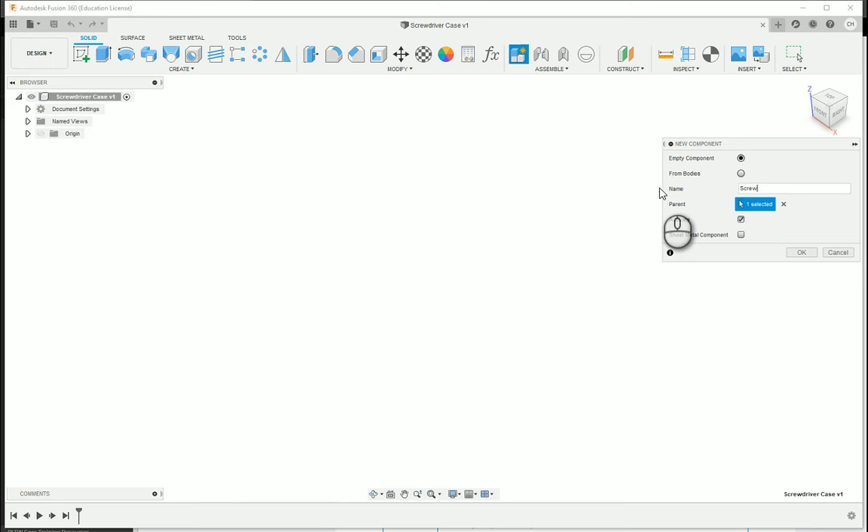Within activity 134 CAD modeling skills, I've already got a folder created. I'm going to call this the screwdriver case, and go ahead and hit save. Now, within the folder, in this new file, I'm going to create a new component, and call this the screwdriver base.

I'll say OK. So this is going to be active, and I'm going to say create new sketch, and choose the top plane here for our base to start off with. I'm going to create a polygon, a circumscribed polygon, and choose the origin as the center.

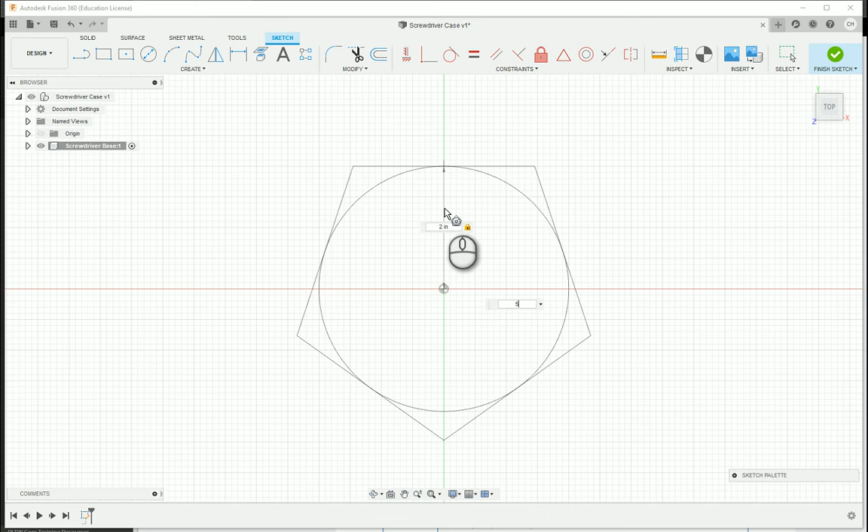I'm going to do 2 inches, and then set 5 sides, and hit enter. Now, just to help maintain it a little bit, I'm going to do a horizontal vertical constraint between this point and the origin, and that'll kind of lock it into place. At this point in the activity, I did 2 inches as an arbitrary number.

We're going to base some measurements off of that. This activity doesn't give us any measurements to work with, so we're just working as we go along. But what we're going to end up doing is say finish sketch.

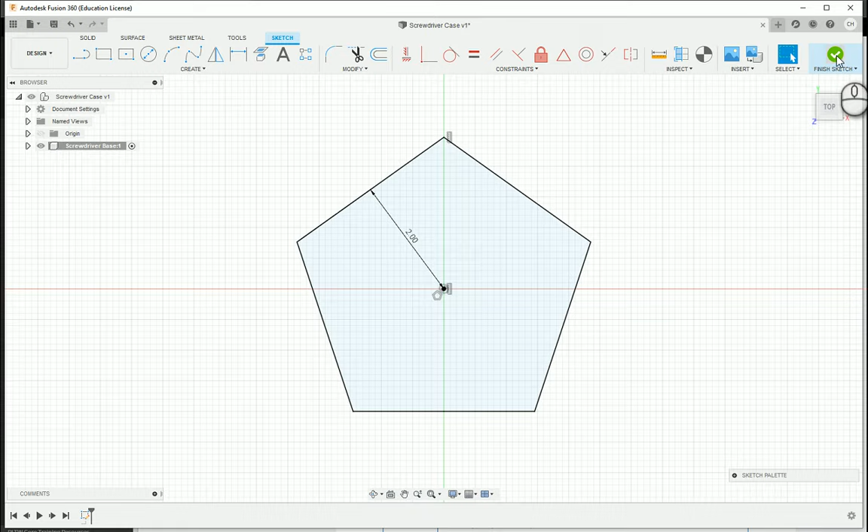I'm going to choose extrude, and we're going to approximate an extrusion distance. I'm going to pull this up just a little bit so we can see the effect. And here the taper angle, we're going to set to 45 degrees. Now, the 45 degrees is going to flare out.

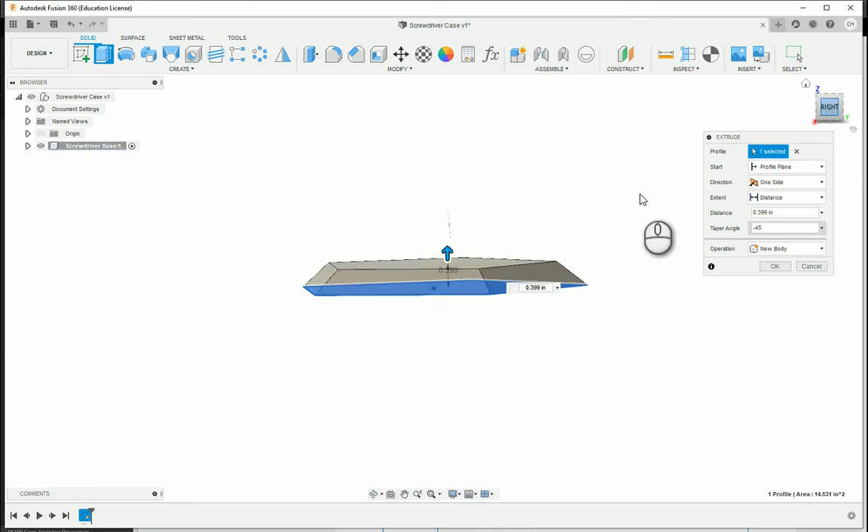What we want is for it to actually come inward, so kind of like this. Now the extrusion distance, again, we're approximating. Let me see what 0.25 looks like. That looks okay, you know, so I think we'll go ahead and run with it. Again, we're just using some approximations there.

Okay, so now for letter B, we're going to create another inward tapered extrusion from the top surface and bring it down toward the bottom. So it looks like we're going to make sure it flares inward towards the top of the part.

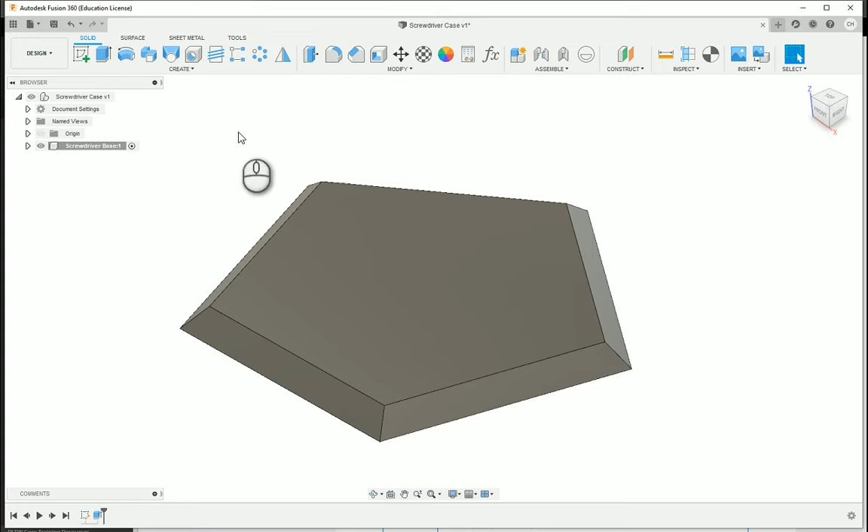So what I'm going to end up doing is create a new sketch. I'm going to choose the top plane, and use the project tool, and go ahead and click these outside lines—not the very outside lines, but the outside lines of the top face. You'll see they turn purple when you get those.

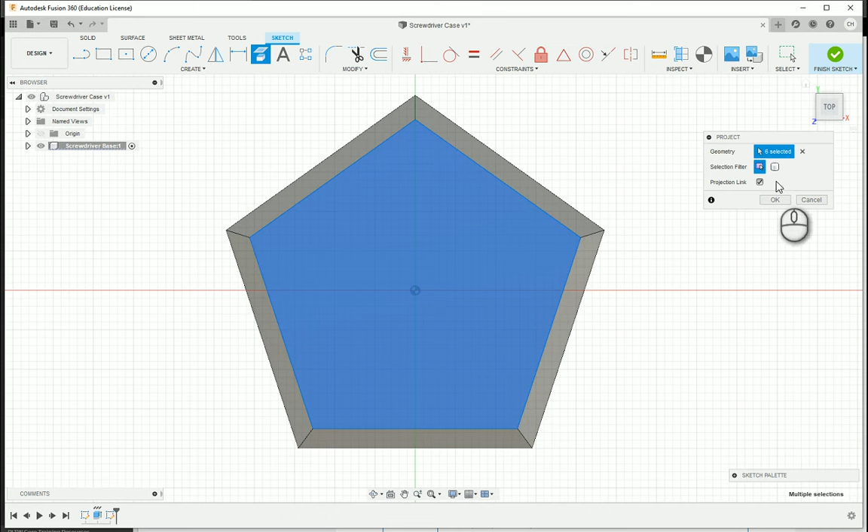And I'm going to say OK. Six are selected, but it should only be 5. I think I might have clicked something twice. But here, 5 sides, goes through. I'm going to go ahead and finish the sketch.

I'm going to extrude. This time I'm going to extrude up. Let's go through and do, based on the heights, 1.5. And we're going to do a taper angle again to the inside. They don't really give us an angle to work with, so I'm going to do 10.

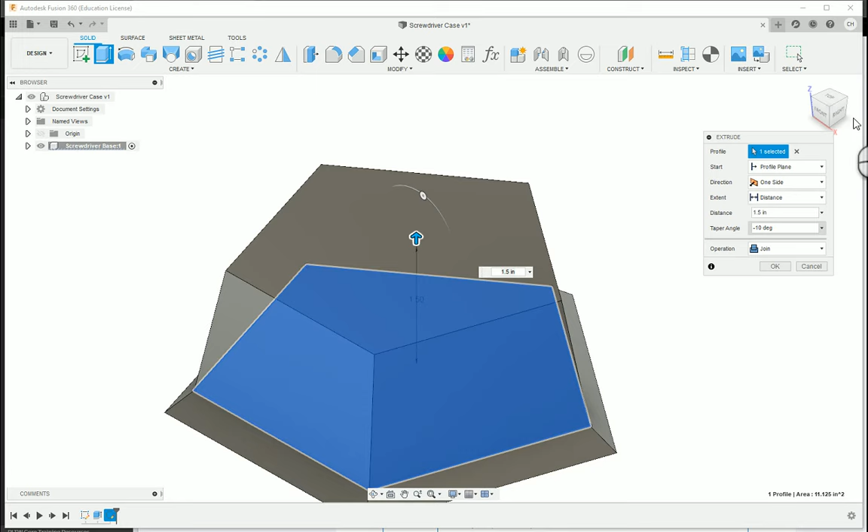Again, it kind of comes to the outside, so let's go to the inside. 10 may be, just from gauging here from the images, a little bit too much. Let's go with 5, negative 5. There we go, and I think that looks pretty good. So I'm going to go ahead and say OK.

So that's kind of how you can use taper angle on extrusion to make that happen. Okay, what we're going to do is create a loft between 2 shapes in order to create the kind of thing. This is number 17.

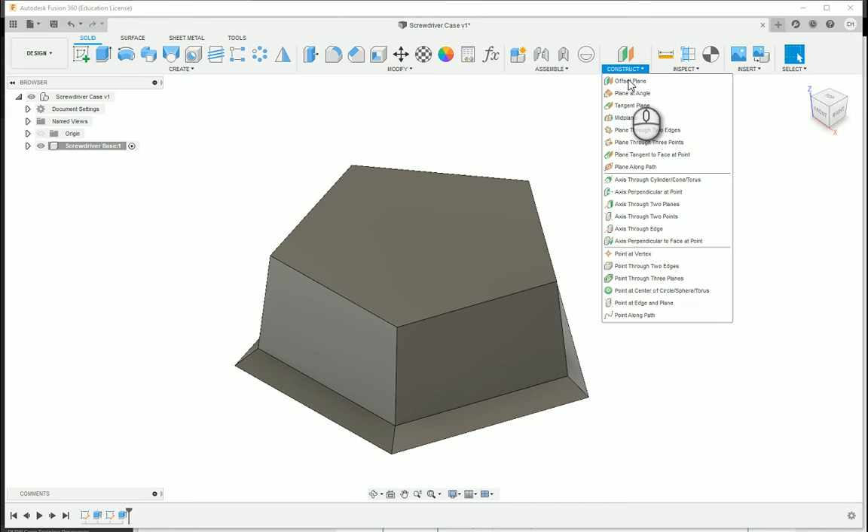We're going to construct a new plane that is offset from the top surface of the model. So this is going to be in the construct panel, and we're going to choose an offset plane. I'm going to choose the top of my base that I have set, and go ahead and set an offset plane.

From the side here, again, they're not giving us any measurements, so let's do 0.5. So 0.5 looks to be pretty good. And what I'm going to do is say OK.

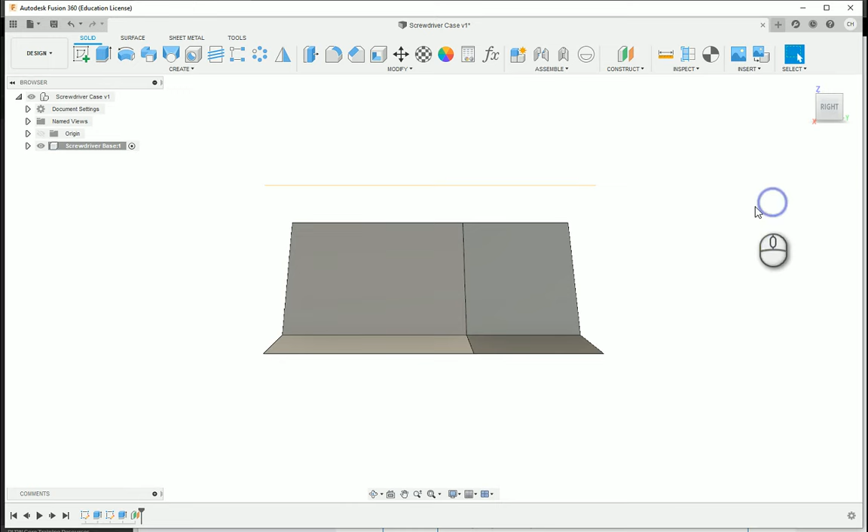And then I'm going to go ahead and create a new sketch on the plane that I just created. And what I'm going to end up doing is project the outside edges, very much like what I did before with the taper.

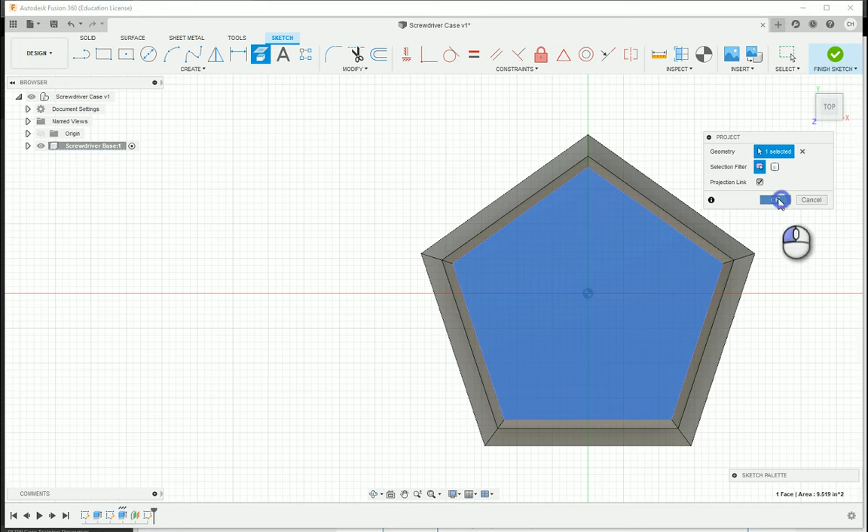I want to choose, if I click inside the shape, it'll also go through and pick up the outside boundaries. There we go, you saw it kind of highlight there. And what we're going to do is identify the center point of the pentagon.

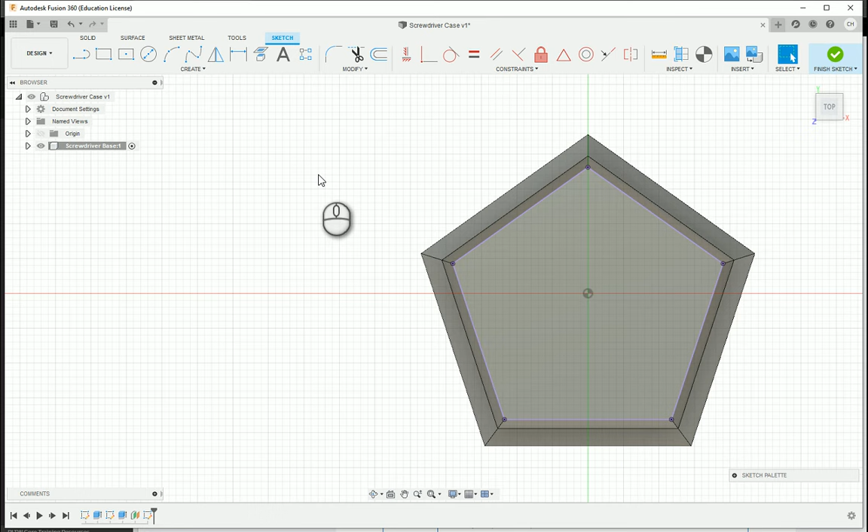What we're going to end up doing is we're also going to go ahead and create a circle that is centered on the center point of the pentagon. So I'm going to go ahead and click the center point, and the circle looks like it's going to be right about 2.5, something like that.

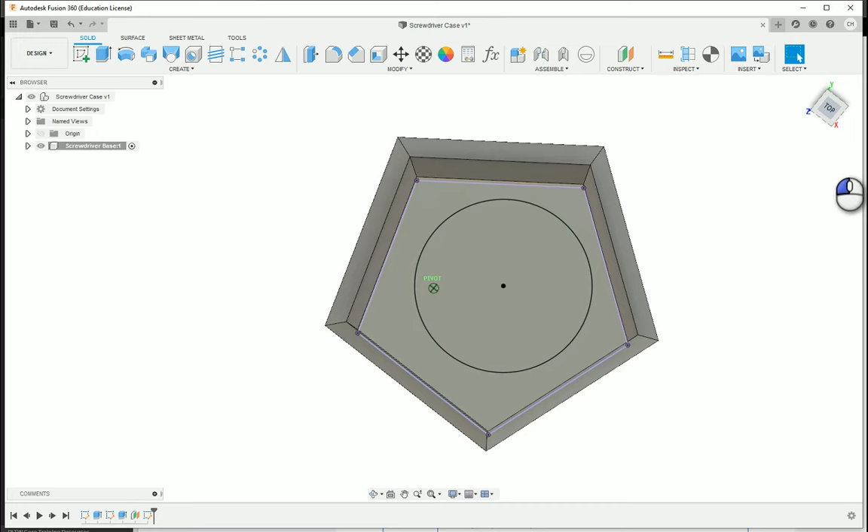We're going to end up creating, I'm going to go ahead and say finish sketch. We're going to create a loft between these two parts. Now it looks like to me this is not very centered. So what I can do here is go back into my sketch and say edit sketch, and I'm going to go ahead and delete this circle.

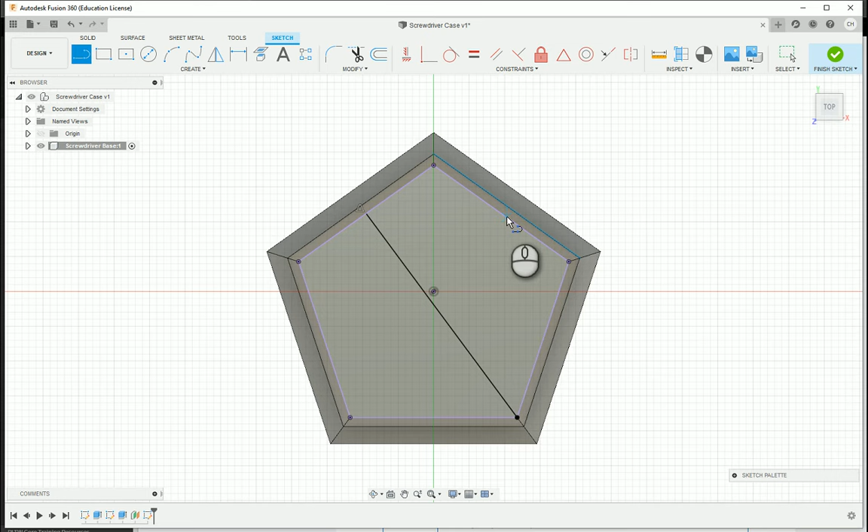So maybe what I need to do is go ahead and take a look at finding the midpoints of my lines here and connecting down to the corners, and then finding that center point that way. So where those intersect, here we go.

And then that would end up being the measurement there. Let me go ahead and put this in 2.5 and say finish sketch. So this is looking a little bit better now. Looks a little bit more centered.

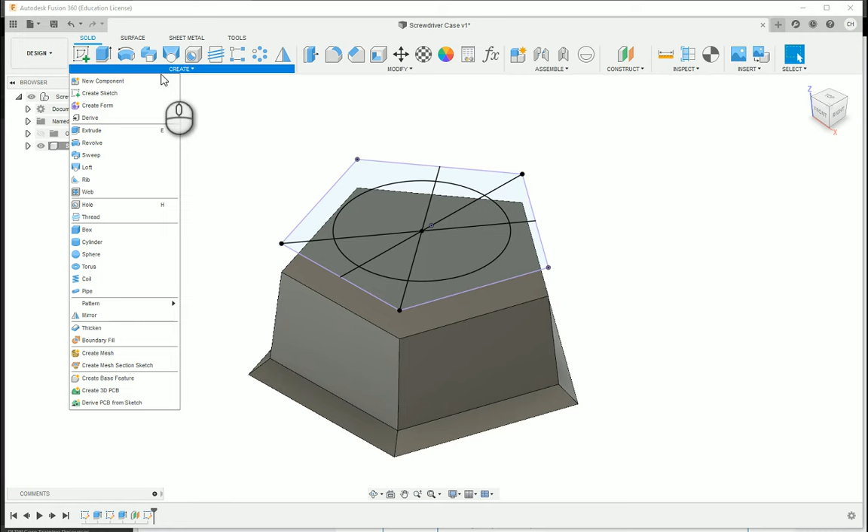So what I'm going to end up doing is create a loft. The loft option is under the create panel, loft. I can actually choose profiles, I can choose this profile that I did before. So this is actually, there's the shape that I'm getting.

And then when I can go through, I can now take a look at setting in. Now you'll see I'm getting these kind of separated components where I just want to go through and get the circle. So maybe the thing that I want to do is go back into my edit sketch.

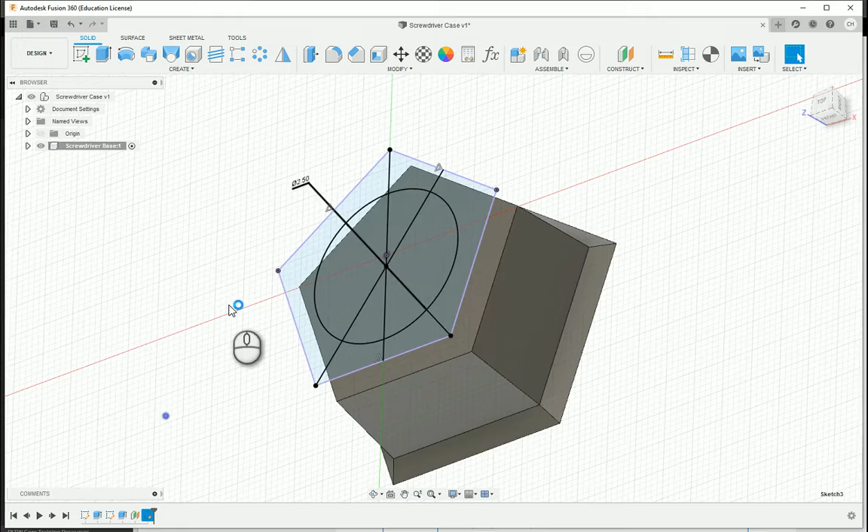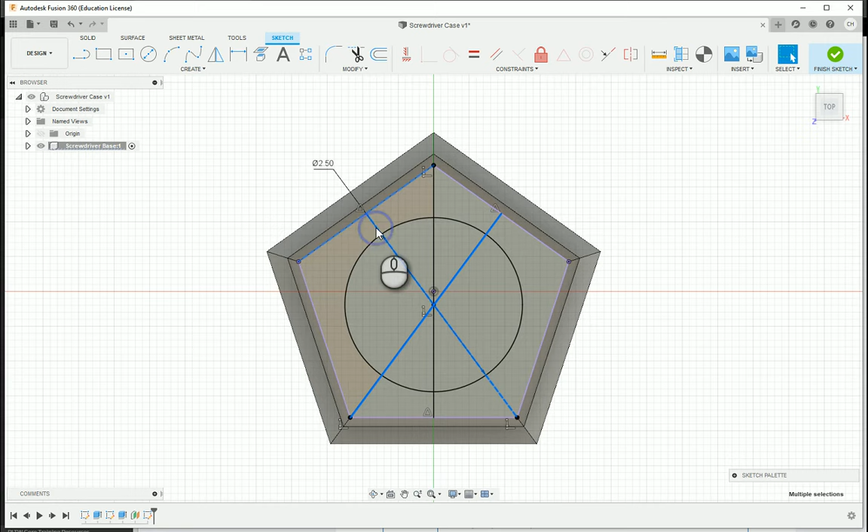That'll happen sometimes, and I can right click on these and turn these into a construction line, as well as some of these outside edges. So this will kind of help me with doing so. I can also hold the control key and select multiple lines and make them construction lines as well. So those are some things that we can do.

So let me go grab the outside lines here and turn those into construction lines. So then that way I just have the circle. I'm going to say finish the sketch.

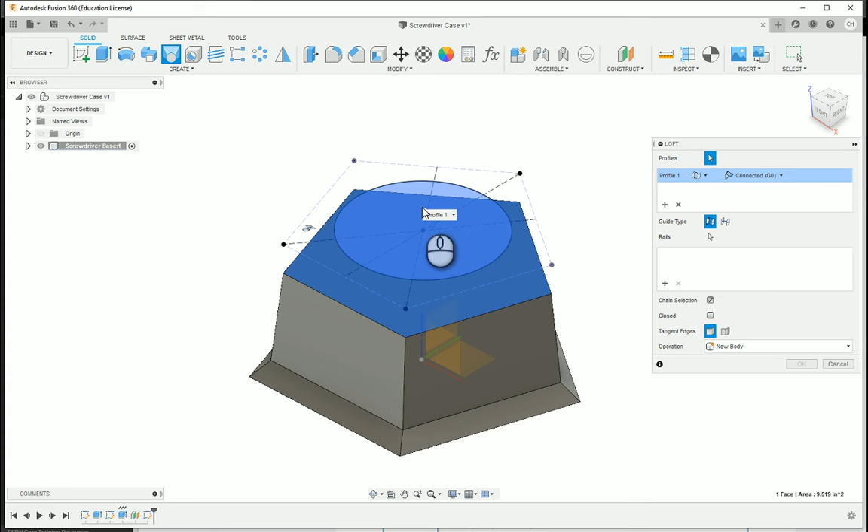Let's try that loft again, choosing this shape. Now you notice the circle is the only thing that's being grabbed, so that can kind of happen. I'll choose the circle, and now there will be the shape that kind of ends up happening. And I can go ahead and say join and then OK, and there would be our base, our new base there.

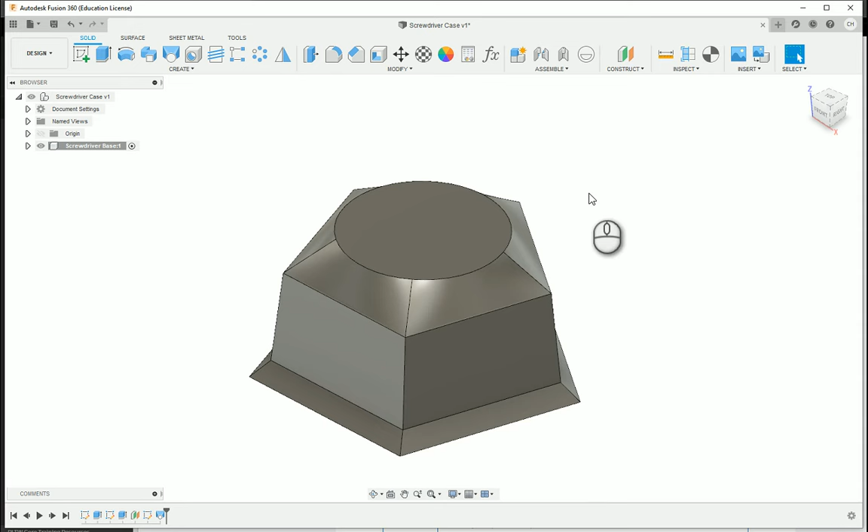As we take a look at number 18, we're going to add another tapered extrusion and a round, to model the cylindrical portion of the base part. So we're going to add, I'm going to go through and be able to say extrude, choose the shape. Looks like about 1.5, and then the taper angle doesn't look like a whole lot, so maybe I'll do a -10. Again that looks like a lot there, so 5, and that looks pretty good.

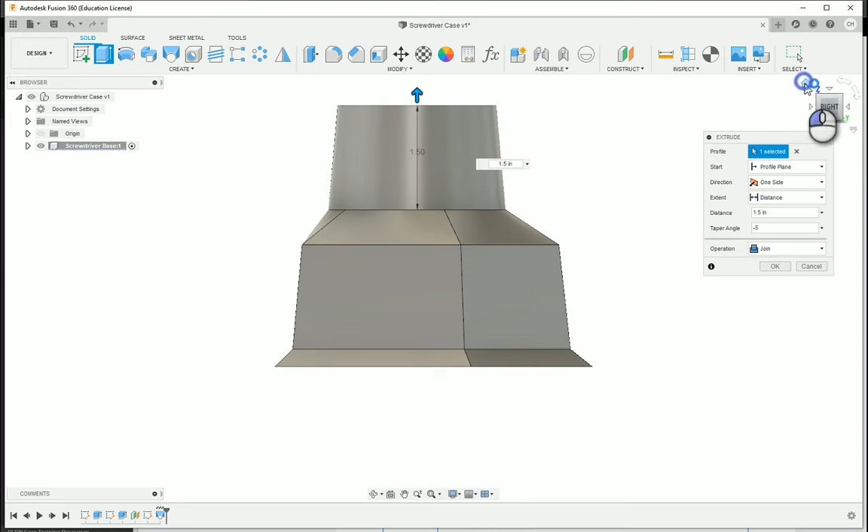So again, kind of taking a look at it from the side, that's looking pretty good there. Okay, so let's see here. Yeah, things are looking pretty good there. So it looks kind of distorted from the side.

And then we're going to add a small round to the top edge. So we can do that utilizing the fillet tool, which is under the modify panel, it can also be up here. Fillet, and then our small round, if I just click along the top edge. Let's do 0.25.

That looks a little bit too much. Maybe we do 0.125, an eighth of an inch. Still looks like a lot. 0.0625, let's do about a 16th. There we go, and that's looking a lot better.

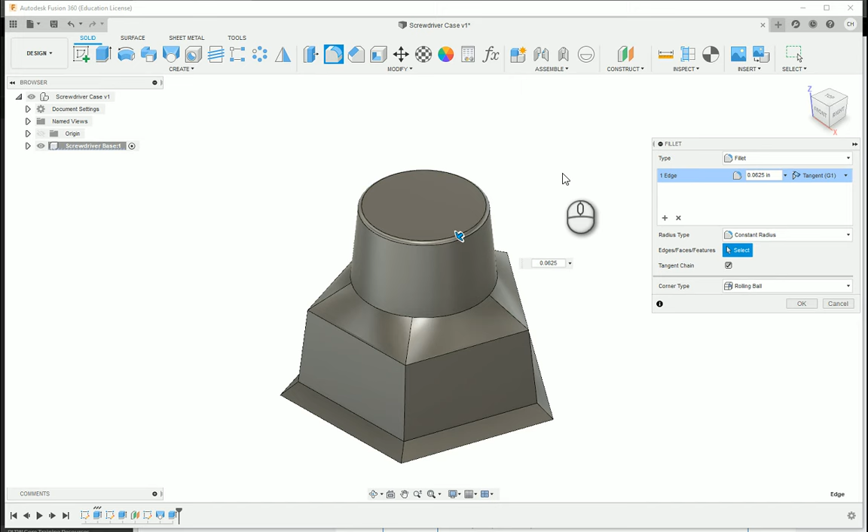Okay, so I'm going to go ahead and say okay, and that would go through and finish up step number 18. So what we end up doing is we're going to go ahead and stop with this video, and this gets us a few of our options created, gets our shell. We're going to be looking at our shell feature next in the next video, and hopefully looking at finishing out this screwdriver base.